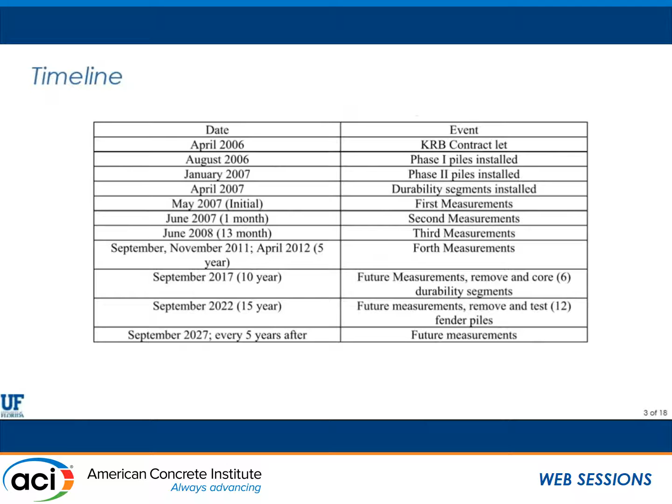So today's presentation is basically the background, the monitoring system that we installed, how that seems to be working, a little bit of data. Really, it's very boring because nothing's happening. We don't have any corrosion going on that we could detect. That's the nice kind of boring, I think.

So let's get started. Our objectives, of course, with the marine environment surrounding Florida's coasts. We have a lot of bridges in saltwater. The typical construction there is to take pre-stressed, precast piles and drive them and then build a cap on top, and that's your substructure. So a very simple setup, but that does then expose the precast piles to the very high chloride levels around where the Anna Maria Island bridge is. They've tested that. It's around 20,000 parts per million, so it's very aggressive. And of course, we have very high temperatures much of the year, and that tends to move the corrosion process along. So the DOT wanted to look at supplementary cementitious materials, and we'll talk about what we actually used there.

They also wanted to use this as a test bed to see how things work short term and how things work long term with respect to corrosion itself, corrosion of the steel within the pile. And this, of course, is pre-stressing steel we're talking about. Also chloride contamination. So how well do the supplementary cementitious materials do with respect to penetration of chlorides?

One additional kind of rider along with this, the geotechs got involved. They embedded wireless EDC sensors for monitoring the pile driving. And this was a new fancy system that was more advanced than PDA, which is basically sticking an accelerometer at the top of the pile and measuring the waves as they bounce back and forth.

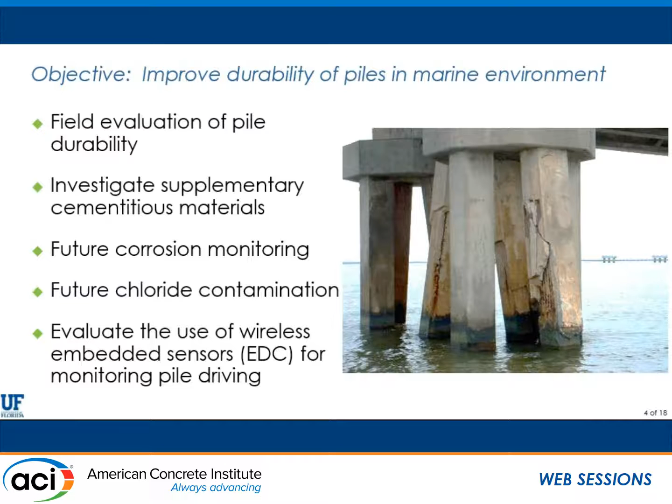These were installed along the length of the pile, something the DOT was looking at for future use. So not a bad place to have a project. It's on Tampa Bay or near Tampa Bay. The bridge itself, as I mentioned, is in a residential area, so it just crosses this little channel here.

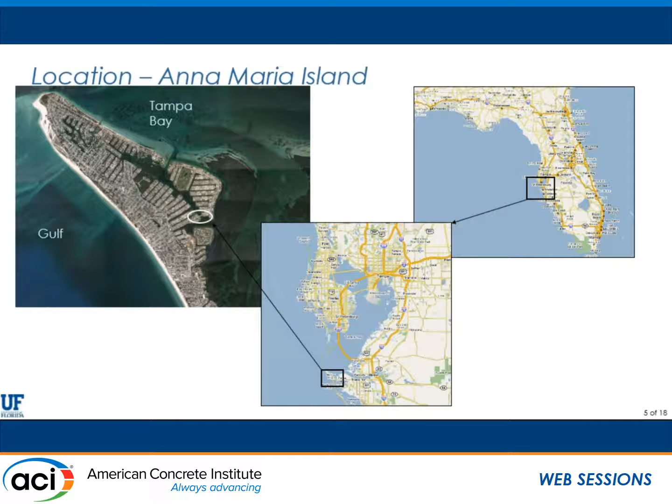It's not really a navigable waterway, but we did install fender piles there. We talked the DOT into allowing us to do that. We're not really protecting it from anything. I mean, you're going to have fishing boats here. You can see the clearance is very low. So the fender piles were actually just sacrificial piles.

So we built several extra piles and jetted those in. We didn't even drive those. The bridge piles were driven. The fender piles were jetted in, and then those are intended to be pulled later, as in years later, for autopsy, structural testing, or whatever we can think of, or they can think of down the road.

The project was constructed in 2 phases, the orange and the blue there. Phase 1 was 2 sets of piles, and then the bents were divided up to accommodate the existing traffic there, and then the blue was the second phase. So the designations there, you see the CEM is all cement pile, and then we have ultrafine fly ash additions or replacements, just a straight up fly ash.

And these were all, again, jetted fender piles, and then the bridge piles themselves, ultrafine fly ash, silica fume, blast furnace slag, and metakaolin. So we had a set of sacrificial piles, since of course we're not going to be able to pull the bridge piles. The bridge is in service. It's not something that we can mess with down the road.

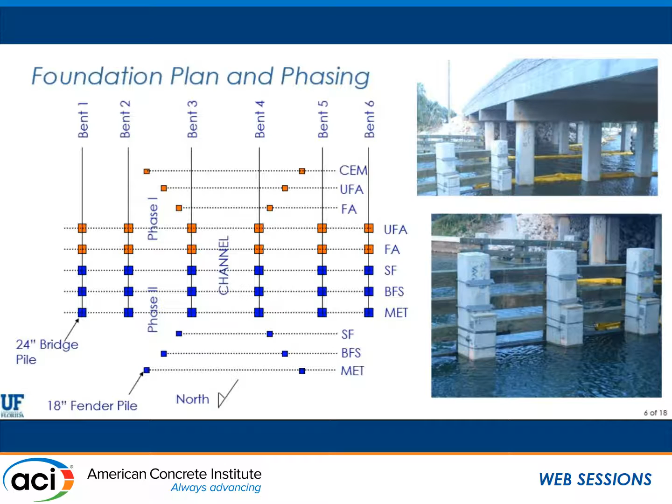So the design itself is based on the standard DOT details. The piles were huge. I mean, these loads are very small. It's a precast plank bridge. Probably the biggest load's a golf cart laden with beer. So there's a golf course right nearby and residential traffic. So you're really going to have very little truck traffic.

So we're not concerned with the loads there, but they wanted to look at beefy or real size piles. So they said, let's just use a 24 inch as kind of our standard size pile. So we went with that. With the pile lengths, there was no splicing required. So we cast the piles into 85-foot lengths for the intermediate bents and then 75-foot lengths for the end bents.

And then the fender piles were a little bit shorter, easier to handle, and smaller. I went with the 18-inch standard piles there, the smallest piles that they typically produce in standard. Pre-stress level is about 1,000 psi after losses.

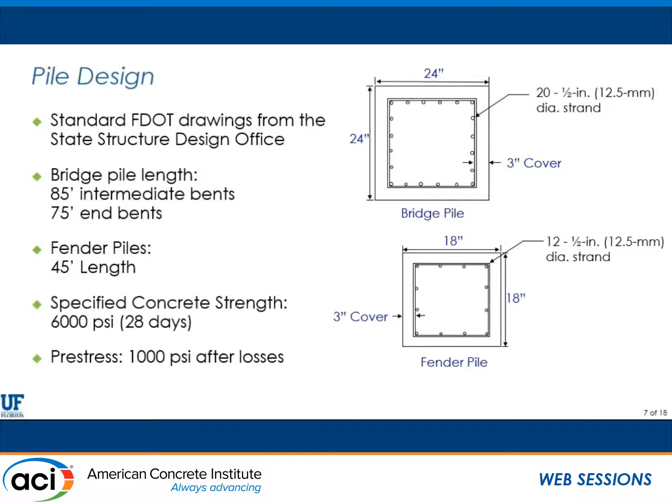So this followed a project or several projects with the DOT where they looked at doing physical tests and durability tests on concrete that's been made with supplementary cementitious materials. As I mentioned earlier, we have blast furnace slag, ultrafine fly ash, metakaolin, silica fume, and then fly ash was their standard. They have fly ash in all the mixes.

So as you see my layout here, cement, for instance, is 100% cement. We have a total of 970 pounds per cubic yard for each of the mixtures, but we did replacement, so the FA would be minus the 20% or so fly ash that would replace cement, and then on down the line we'd have silica fume plus fly ash replacement, metakaolin, ultrafine fly ash, and then blast furnace slag.

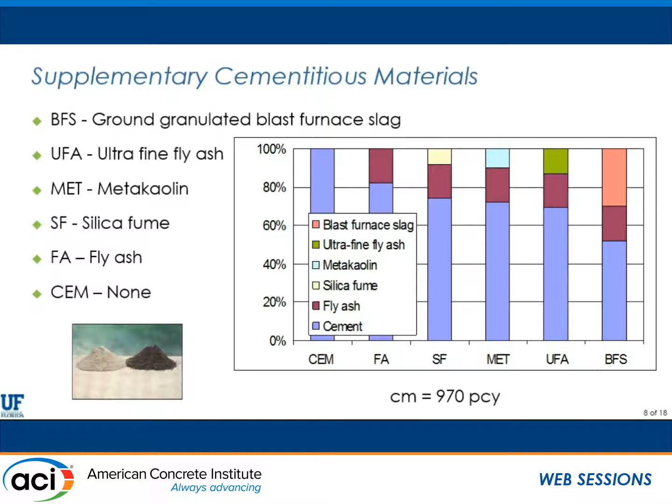So they're really kind of ternary blends in the end when you look at it that way, because the DOT wanted to maintain that fly ash, that kind of mid-sized particle size, and then you have the finer particles in there as well. So our instrumentation, this is where we really spent a lot of time thinking about what we wanted to have in place way down the road.

We created electrical connections with the pre-stressing steel, so we brazed electrical connections up at the top so that we could do potential measurements straight up on the surface of the concrete, half-cell measurements with copper sulfate electrode. We also installed isolated steel and titanium pieces that look like this using a super special process that the DOT helped us with, which the Corrosion lab uses typically for their cathodic protection systems.

The nice thing about this is that we can measure corrosion rates at the depth of the pre-stressing steel here because we know the area of the working electrode. And we have a nice titanium counter electrode so we can actually do straight corrosion rate measurements. We haven't done any of that yet because there's really nothing going on. All we've done is potential measurements. But we also have electrical connection with all the pre-stressing steel, and that's all tied together with the ties as well. So we have multiple ways that we can get to corrosion rates.

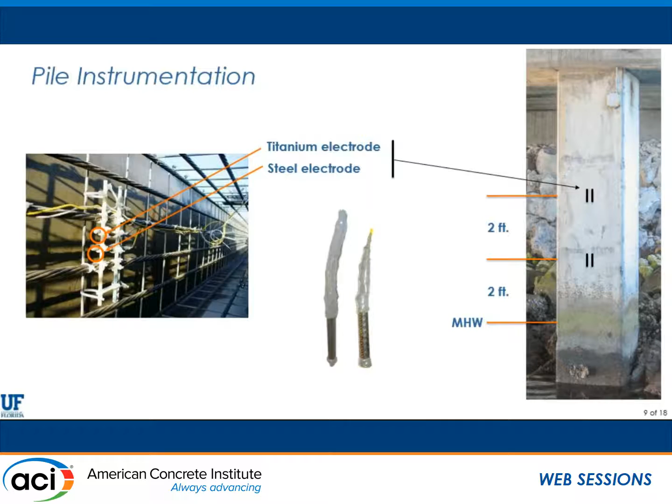Part of the problem with maintaining an exact height above mean high for our sensors is that the piles don't all get driven to the same elevation, right? So we actually anticipated that, believe it or not, and decided to add what we called a durability segment. So while we were casting the piles in the self-stressing form here, we subdivided a little short 4-foot section and we cast a 6-inch thick or so piece of concrete using the same concrete, same pre-stressing steel that are in the piles.

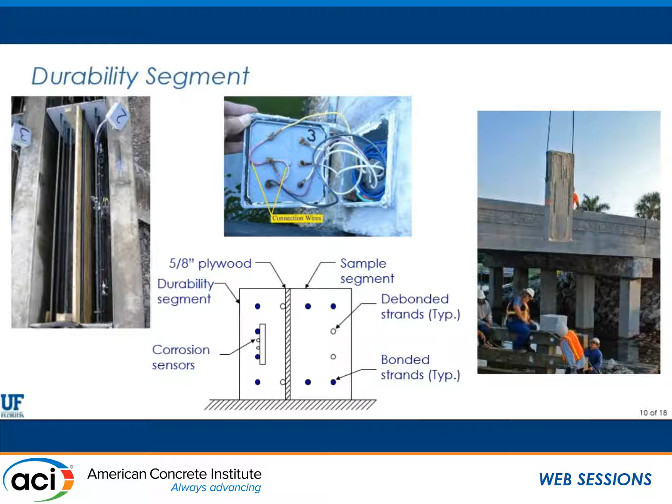And then these are actually hung from the fender piles after the bridge was constructed. So then they allow us to get the electrodes or the corrosion sensors all at the same elevation. So, with the tidal fluctuations there, for each of the different materials, we're getting the same elevation, because the corrosion rates, of course, are going to vary depending on if you're in the tidal zone or the splash zone. And so that's very important to maintain that consistency.

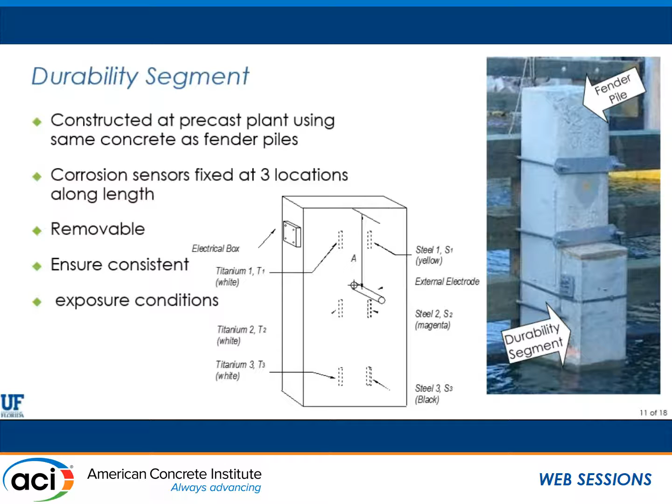As I mentioned, the durability segment is hung from the fender pile. So the first thing we'll pull is the durability segment at some point in time when we feel it's necessary or useful. And then the second thing that'll get pulled will be the fender pile, which is kind of sacrificial. So we were thinking 15 years down the road, 20 years down the road, something like that. We're hoping that we don't see a whole heck of a lot before that time anyway. So as I indicated, we have corrosion sensors installed in 3 different locations, and these durability segments were all hung at the same elevation, so we could maintain that consistency.

So the pile construction was at Durastress, so these are real piles. We were there taking samples. Lots of sampling was done, both from a durability as well as mechanical materials perspective. We had them cast us some chunks that we could take cores from. In addition to that, we did molded beams and cylinders to do, like I said, long-term and short-term tests.

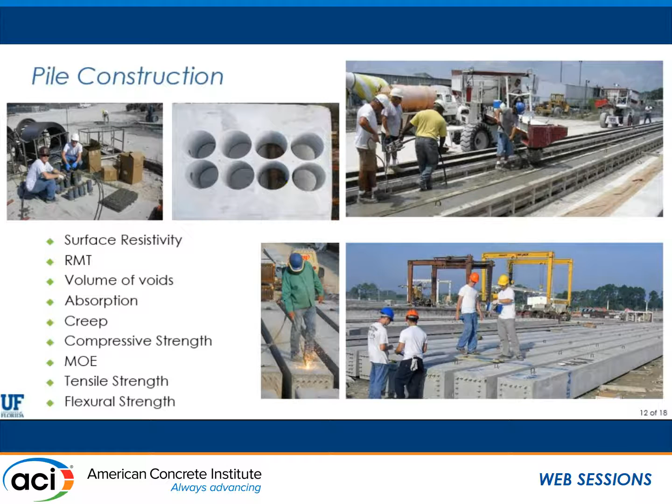As you might imagine, it was a bit of a coordination effort for us to make sure that when the piles were delivered to the contractor, they installed them in the place and orientation that we wanted them. Normally, the contractor's just grabbing the piles and throwing them into place, so we had to have the students mark the piles, make sure that we got them installed the right way up, so their sensors were in the right location. Our f'c for the piles was 6,000, which we got at 28 days, no problem. You can see some of the differences in the strengths there with the additions.

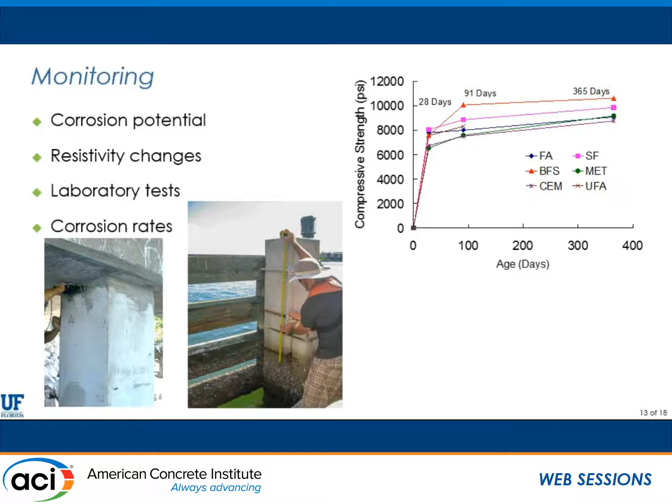Our monitoring program is basically, all we've done to date is take some corrosion potentials and do some resistivity measurements between the titanium and the working electrode. We've done a bunch of laboratory tests to document the concrete that was used to produce the piles. Those reports have been published and they're posted on the DOT website. We also have the opportunity to do corrosion rates down the road if so desired.

So as of about 5 years out, I'll just give some real quick results here. If you look at the plot, you see the potentials versus copper sulfate, so less than the 200 millivolts, less negative, means no corrosion. You get more negative, that means lots of corrosion.

But keep in mind down here where the concrete's wet with salt water, you're going to get those high readings anyway, so what you're really looking for is kind of the movement of the upper levels, the splash zone, and the upper portion of the tidal zone moving towards that more negative number as you're starting to see the potential for corrosion to occur there.

The right plot shows the time, so we're 4 years out at the edge of the plot here, and we really haven't seen a change in that corrosion potential in the 4 years' time. Over the first year, you're going to see some changes because of the curing that's going on with the slower and the faster reacting materials.

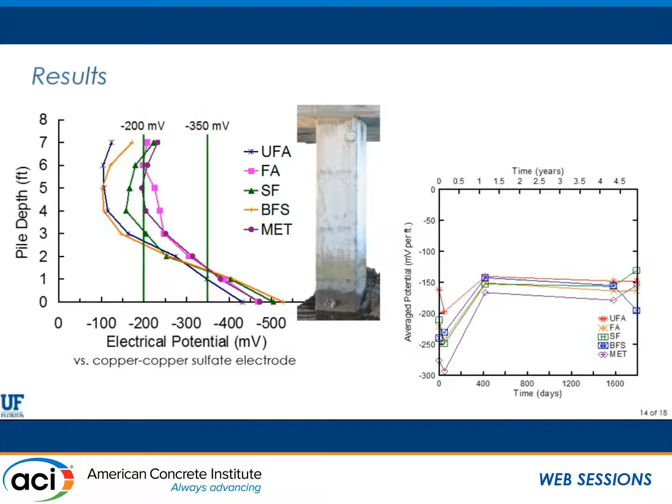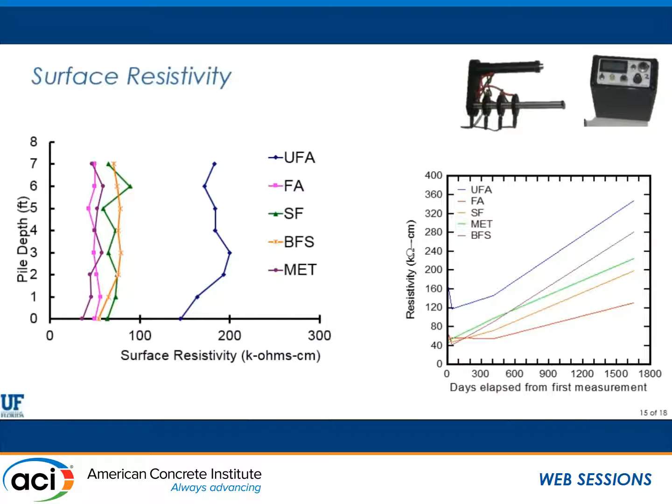The DOT is very interested in surface resistivity, so we did some field measurements with that, which is a really tough test to try to get consistent in the field because the moisture content of the concrete is extremely important. So we did some testing with that, fairly consistent with the exception of the ultrafine fly ash. Not really sure why we got some elevated readings with that.

As part of this work, there was some prior research done where we did bulk diffusion tests with these ternary blends and looked at diffusion coefficients and the improvement in the concretes. The DOT has since, a few years ago, added this to their construction specifications, silica fume, metakaolin, or ultrafine fly ash, along with the addition of fly ash as well for their piles.

One thing I didn't mention is that they require a curing regimen in the yard. The contractor is required to leave the piles in the forms and cover them with burlap and wet cure them for 3 days, if you can believe that. So good curing process with that.

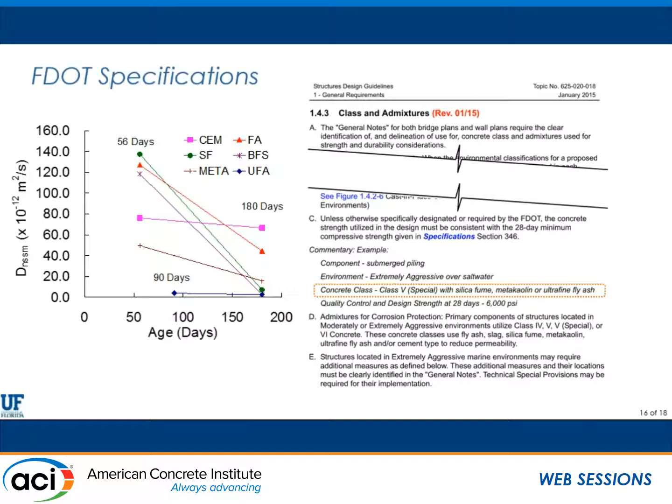Some closing thoughts on structural health monitoring with respect to my experience with the project. Once we got finished with the IBRC project and we finished our projects out, where does the data go? Well, it's basically stored in the report and it's online, and then I have it, and that's about it. I'm not sure how all that's going to shake out, but I think we need to start thinking about how owners are going to deal with data, and I'm, of course, talking from the perspective of the bridge owner, and then data archiving as well.

And how do we take care of the health monitoring system? We learned a lot of lessons in this, and we took a lot of lessons from the corrosion lab in preparing our wiring, and that actually worked very nicely, but we're only 5 years out. We're looking at 20, 30, 40 years perhaps down the road. We like to be doing in-place measurements. In place, we have sacrificial elements that we can pull out and take back to the lab. So we at least have that. We may lose the monitoring capability in the bridge piles themselves, but at least we have a set of specimens that we can look at down the road.

Finally, is the health monitoring system going to outlast the subject, or is the subject going to outlast the health monitoring system? In my experience the subject typically outlasts the health monitoring system, particularly when you have data loggers and electronics, and we don't have any of that out here, this has all been manual measurement. We considered putting a Campbell data logger out here to measure temperatures, but decided not to do that and just stick with the corrosion monitoring.

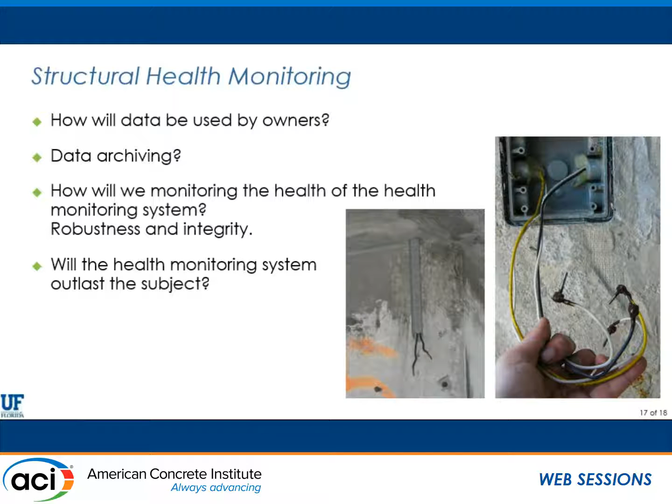I appreciate your attention. I'd like to point out that there are several reports on this bridge. If any of you are interested in doing life cycle modeling, there is a lot of data here that's available in the reports and would be something that you could use to test life cycle modeling or anything else. So kind of a little advertisement there.